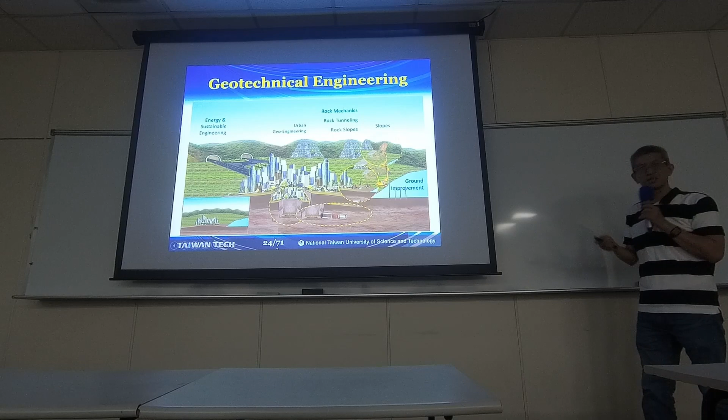For this division's research topics, our department also provides useful and advanced testing systems. This is a geotechnical laboratory. In this laboratory, we have so many testing systems and measurement instrumentation. If you are interested in this field, welcome to visit our department anytime.

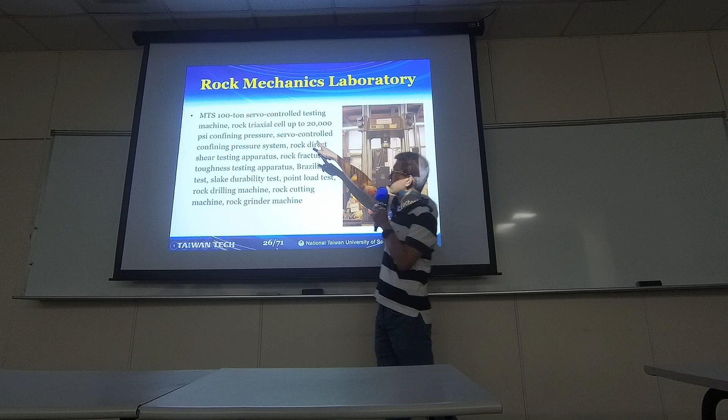In addition to the geotech lab, we also have a rock mechanics laboratory. We have a 100-ton capacity servo-controlled testing machine, as shown in this figure, so that we can apply compression force or tension force to the specimen.

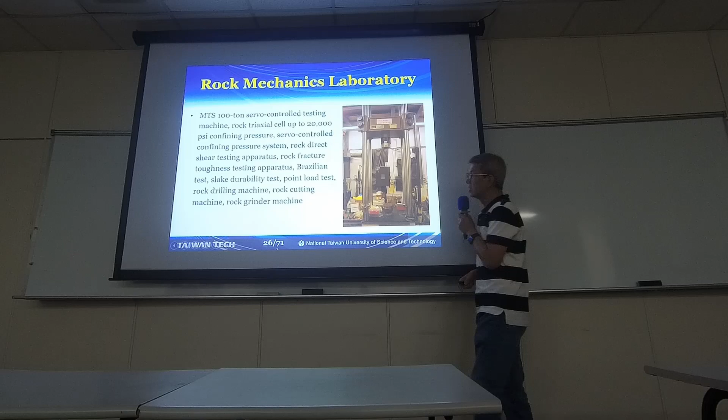Also, we have a rock fracture toughness testing facility, a rock cutting machine, and so on.

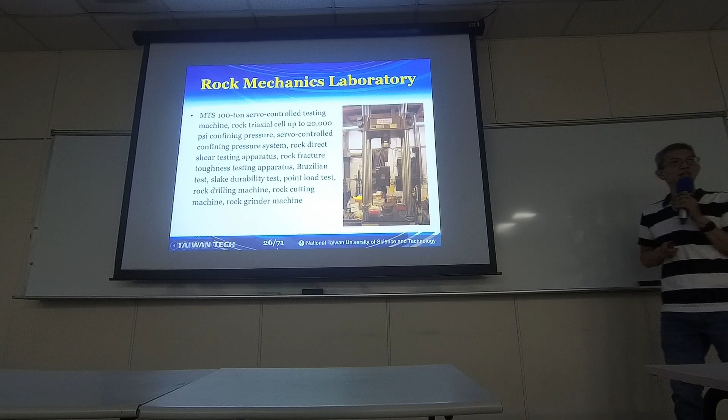When you take the courses, you can use this testing system to better understand what you learned. Also, for graduate students, most of the research you perform requires carrying out tests, so the roles of these testing systems in this division are very important.

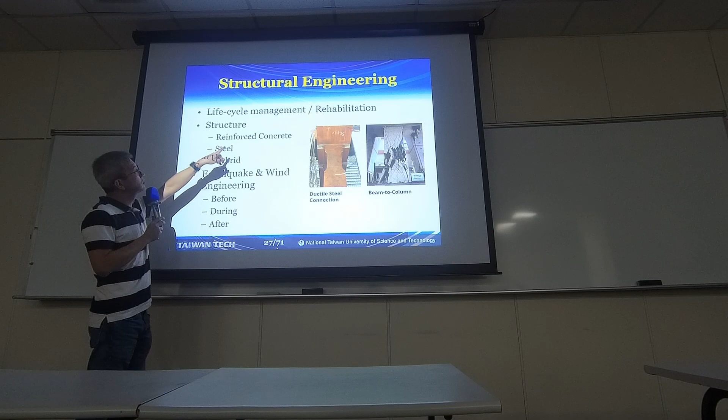The structural engineering division covers life cycle management and rehabilitation, retrofit. As I mentioned, creating a new building is not the only assignment for structural engineering. In addition to new structures, we also need to take care of the whole life of the building, so we need to pay attention to life cycle management and how to effectively retrofit damaged structures.

This includes structures of reinforced concrete, steel, and even hybrid composite. In addition to structural or non-structural elements or infrastructure, how to consider earthquake and wind loads is also a very important issue.

Of course, it's no problem to make a very strong structure, but this is not cost-effective, not efficient. So we quantitatively define criteria in a design requirement. Based on this defined criteria, we can design structures considering suitable seismic load and wind load.

However, this is the design and analysis stage. As I mentioned, being a structural engineer isn't only about new structures, we also need to pay attention to existing structures.

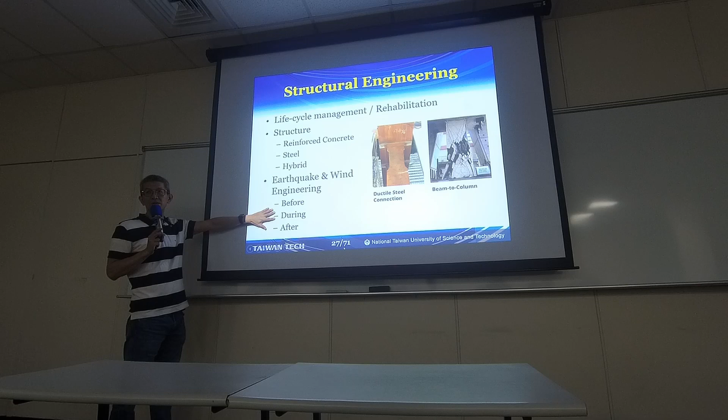So before we analyze and design the structure, during its life cycle, if it's subjected to damage, or undertakes earthquake load or wind load, we need to monitor and inspect for any damage. If there is damage, we need to retrofit the building. This is the mission and assignment after an earthquake or after load.

This photo shows some test results. For example, we carry out tests on ductile steel connections so that we can guarantee structural design satisfies the strong column and weak beam principle, so the expected ductile behavior will occur.

Even though this is a civil and structural department, the concept is the same. As I mentioned, making a very strong structure is not difficult, but it's not efficient, and not practically doable.

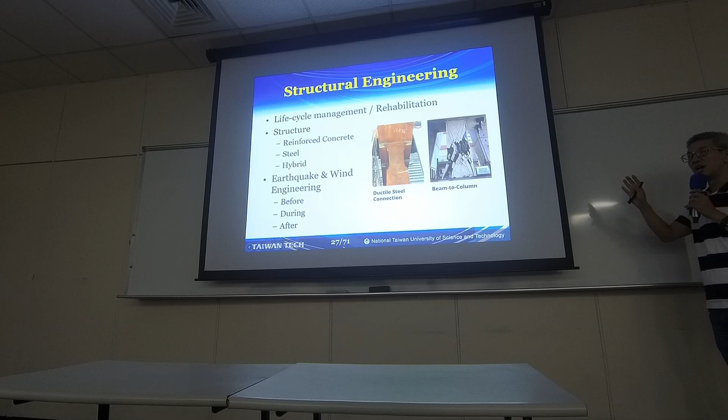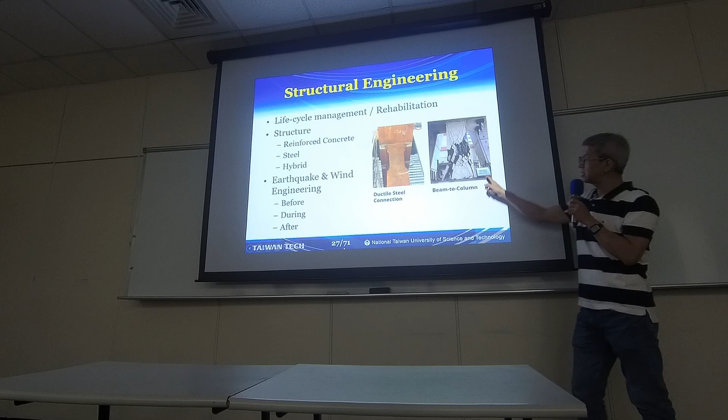But this is what I want to emphasize: in addition to strength, we also require the structure to have ductility. In addition to steel connections, this is a photo about a beam-to-column connection.

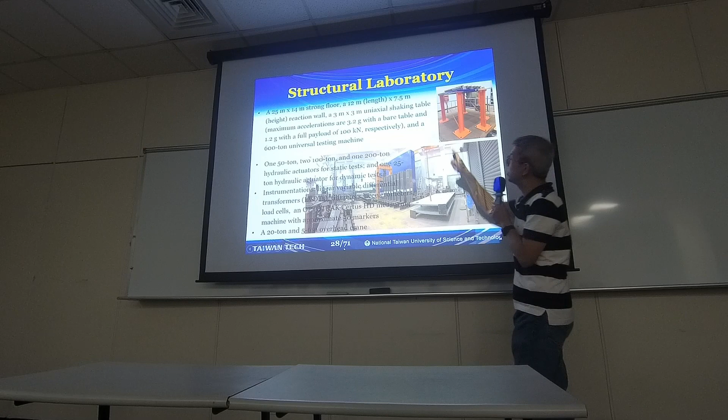In this division, there is a structural laboratory, including a strong floor and reaction wall, and also a unidirectional shaking table. The strong floor is 25 meters by 14 meters, with a 12 meter length and 7.5 meter height reaction wall.

By using this facility, we can perform static and pseudo-dynamic testing on full-scale specimens.

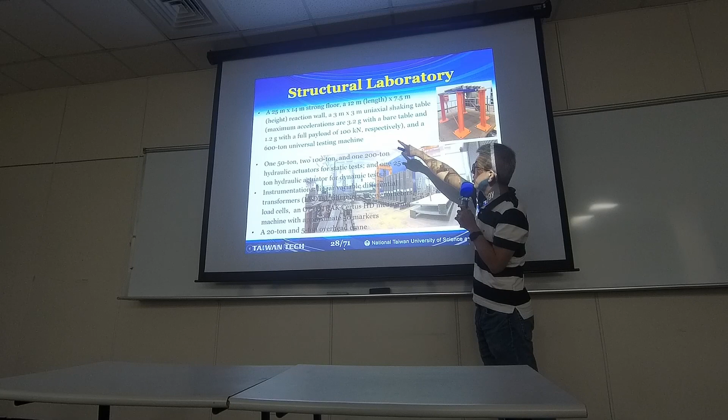Also, the shaking table's actual dimension is 3 meters by 3 meters. The maximum acceleration is up to 3.2 g. The full payload is 10 tons, and with the full payload, the maximum acceleration is up to 1.2 g.

In addition to these big facilities, we have a universal testing machine with a capacity equal to 600 tons. By using this large-scale universal testing system, we can apply a very large compression force to structural components designed to sustain vertical load, for example, columns.

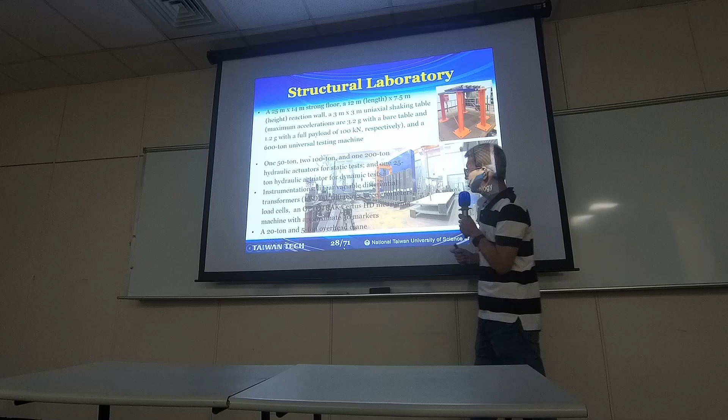We also have many actuators, which we can mount on the reaction wall so that we can carry out static and pseudo-dynamic tests. And we have many measurement instruments: accelerometers, displacement transducers, load cells, and some non-contact optical measurement systems.

This is also very unique in Taiwan, because this subject is very rare in other Taiwan universities, so it's very unique in our department. And we also developed some solar glasses, which have been used in some high-tech factories.

And the sponge city is a very important issue right now and in the future. We hope the society, the city, can have very strong capacity to resist any disaster, but this is not realistic and not feasible.

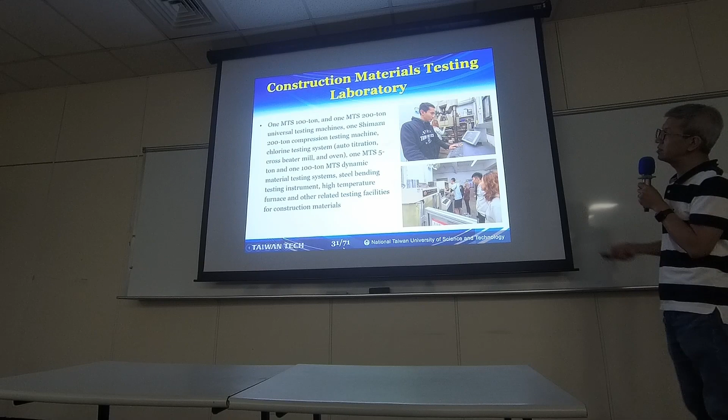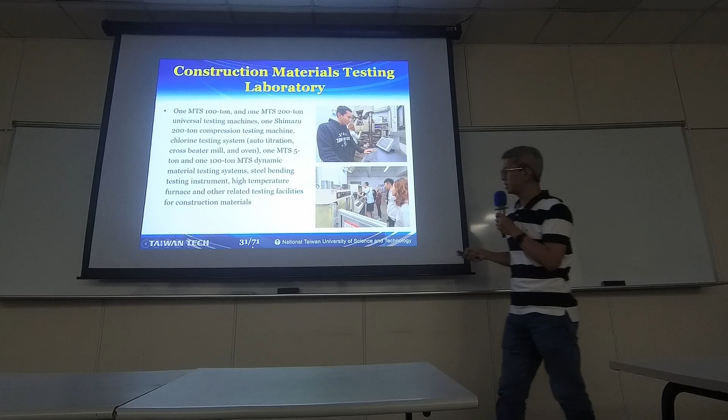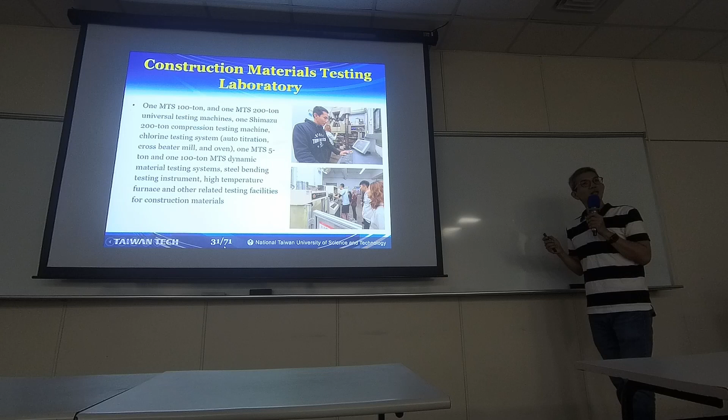We also have the materials laboratory so that we can do some material tests. In the construction material laboratory, we also have medium scale universal testing systems, 100 ton and 200 ton universal testing machines. As you can see, we have so many testing facilities. As an undergraduate student, when you study some courses, if needed, you can also use this testing system and learn some skills, which is very useful for undergraduate students.

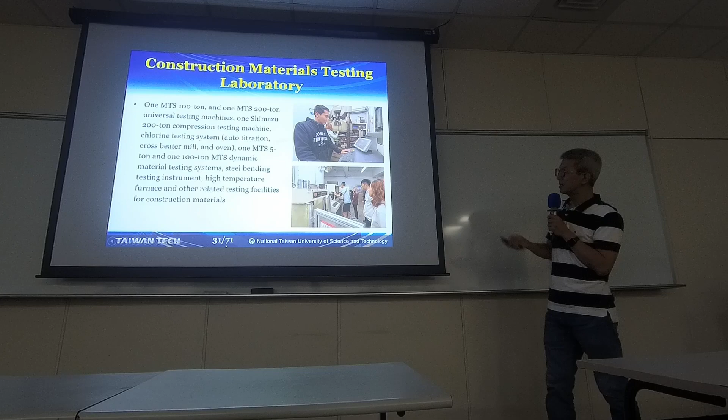You don't need any physical interface. You can still do some analysis, do some design, or even do some simulation.

BIM is a very powerful model, used during analysis, during design, during construction, and even after the structure is completed. By using this model, we can record anything, any details about the structure. It's very useful for architecture, for structural designers, and for civil engineering designers, and even useful for owners. Once it is completed, if you want to trace some detailed information, we can refer to this model, which has anything, any detailed information about the structure.

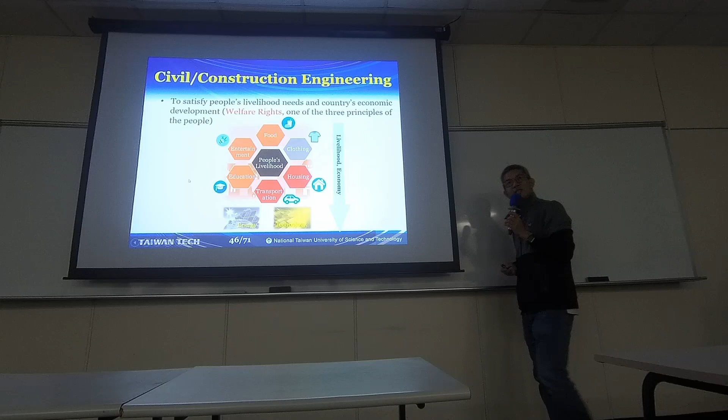I just use this slide to show you that structure, civil and construction engineering is highly related to our life, including food, clothing, housing, transportation, education, and entertainment. These are classified as welfare rights. Also, regarding the development of a country and major industries, for example, energy industry and high-tech industry, the successful development of these industries actually depends on our industry, depends on civil engineering. This is because everything should be located in a safe structure, so that the development of these industries can be guaranteed.

I also use this to emphasize the importance of our industry based on Maslow's hierarchy of needs. We know that some people need self-actualization, some people need esteem, some people need love and belonging, and some people think that safety is important for them. But most people need air, water, food, shelter, sleep, clothing, and reproduction - these physical requirements. You can see that these physical requirements are highly related to our industry, civil and construction engineering.

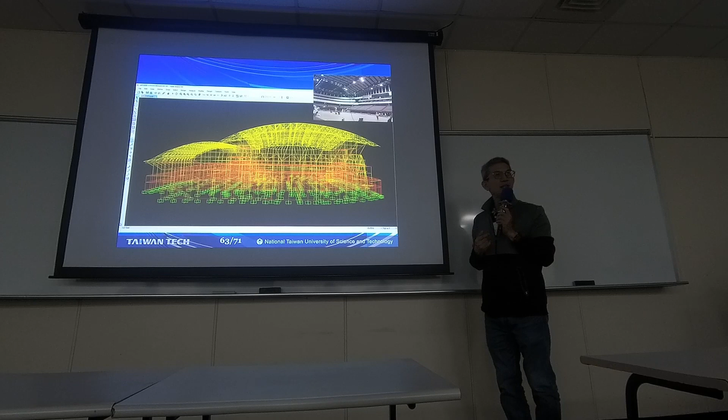We also proposed some strategies. For example, you can use isolation design to isolate the vibration from the surroundings. But this is not the most effective. The most effective strategy is to ask all attendants not to jump during the concert.

Everything looks fine and beautiful, but according to statistics, we have so many earthquakes per year - more than about 23,000 earthquakes, of which 1,000 can be felt, and one is destructive enough to cause damage. On average, every 15 days an earthquake of intensity 4 to 5 occurs.

So for our city, especially Taipei City, it's not enough to ask all structures to have sufficient strength or capacity to withstand earthquakes. This is not realistic, and in fact it's impossible.